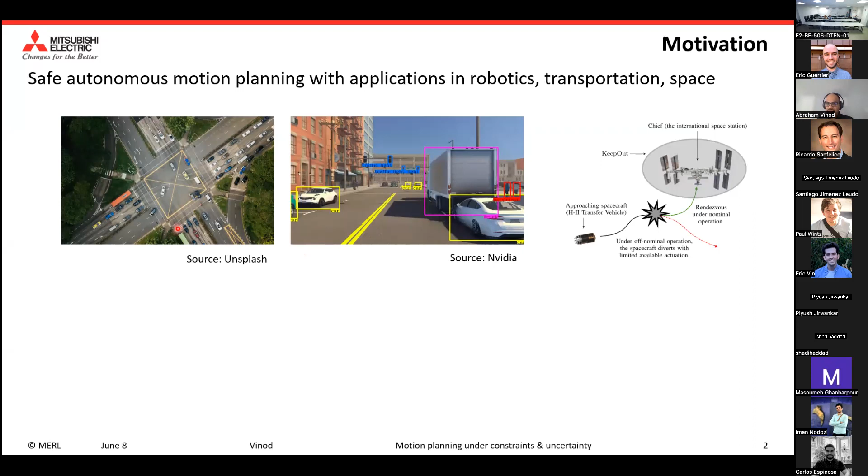So three motivating applications that I want to highlight in this talk are shown in these three figures. One is the need for fast and resilient multi-agent motion planning. This could, for example, come very handy when we have multiple autonomous systems navigating an intersection, or in factory automation, where you would have drones coordinating with each other while they transfer packets here and there.

A second problem that I want to talk about is the need to accept the fact that control on its own is not the end solution. We need to constantly interact with other modules like perception and sensing. And naturally, these sources of information are not always abundant. While these computing systems are becoming more and more powerful, there is definitely need to account for the fact that these computations take time. So we also would like to investigate motion planning when sensing is constrained.

And that's what I'll probably touch on in my second part of the talk. And the third part of the talk is the need to make sure that whatever planner we generate is resilient. By resilient, what I mean is, in an example like spacecraft rendezvous, when we're autonomously trying to dock with a spacecraft, in case of an event of a failure, for example, an actuation failure, we would like our motion plan to be such that we can abort safely. So we need to have a component of graceful degradation baked into our motion plan. This will allow us to ensure that the entire autonomous system stack is resilient under unexpected failure.

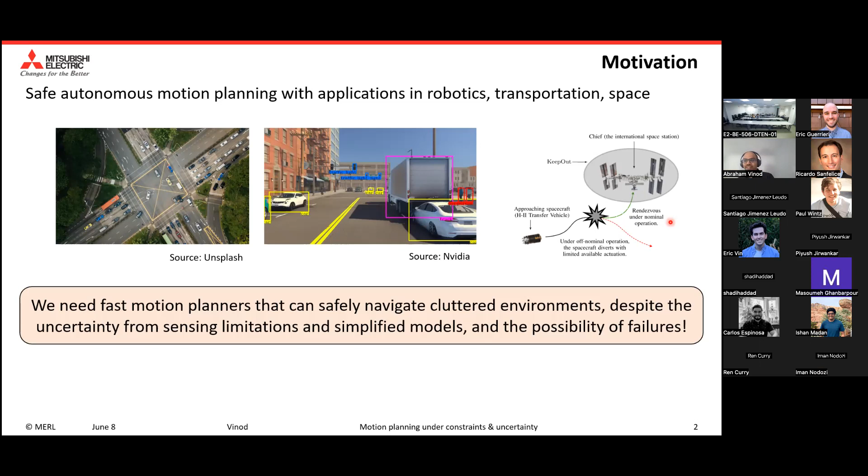So all in all, what I'm hoping to get you guys excited about is that we need fast motion planners that can navigate cluttered environments where there are a lot of obstacles and other agents acting in the environment, and we want to move in this environment safely, despite various sources of uncertainty, some coming from sensing limitations, others coming from the simplified models that we need to do fast motion planning. And together, we want to generate these plans such that we also account for the possibility of failures, and we do not cause more issues when a failure occurs, and we can stop prematurely.

And my proposal is to use data, reachability, and constrained control theory to solve this problem. That said, I have not solved the entire problem yet. This is very much a work in progress, but I can give you different directions that I've pursued, and hopefully I would love to hear your thoughts on if there are things I can do better or we can collaborate on.

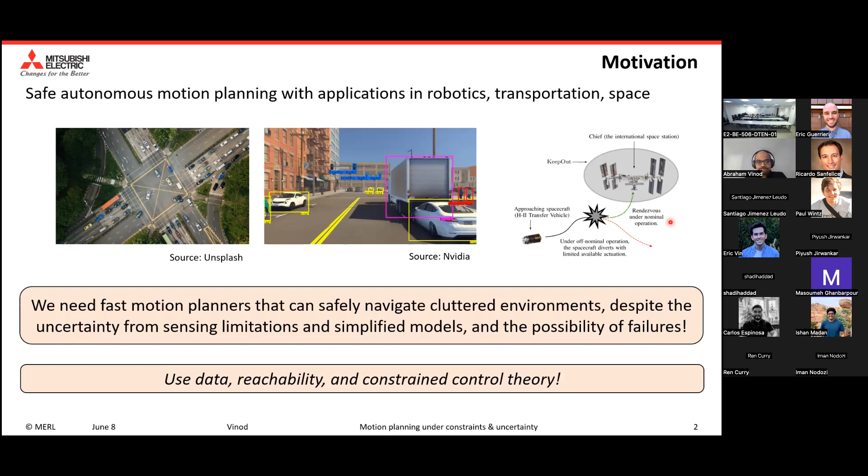So to give an outline of my talk, I'll start with the MERL overview. Since you guys have already probably heard of it, I'll maybe skip through things a bit faster.

The first part of the talk, I'll talk about safe RL-based multi-agent motion planning. Here, we basically try to ask the question: can we leverage learning to do safe multi-agent motion planning? I'll have some nice demo videos that we did with our experimental validation using Crazyflies.

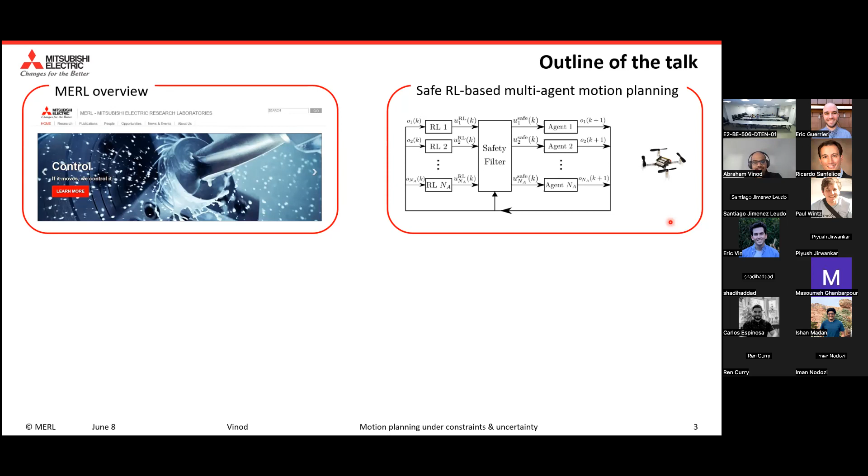In the second part of my talk, this is my work that came out of my postdoc, where we did safe motion planning under uncertainty when the sensing is constrained. This again we were able to validate nicely with TurtleBots. What we were trying to aim for is when we have very limited access to sensors, how do we sense obstacles so that we can reduce the uncertainty while planning in a cluttered environment?

Finally, if time permits, I want to also touch upon the safe spacecraft rendezvous problem, where we are trying to dock with the spacecraft autonomously while always ensuring that we can divert away safely in the event of a failure. All of these solutions use a combination of data, reachability, and constrained control theory. That's why I feel like these three are crucial ingredients to allowing safe autonomous planning.

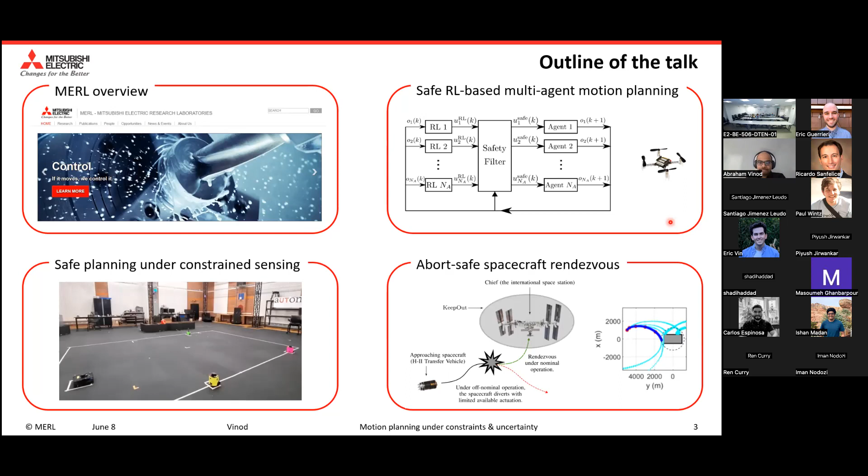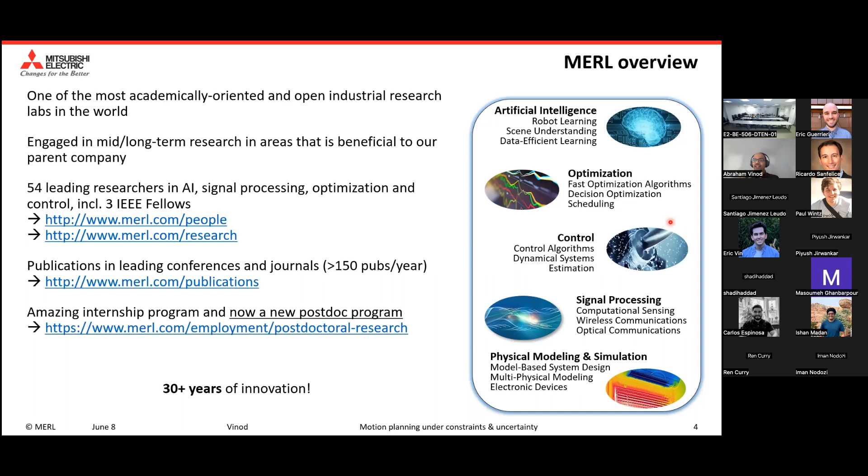So to get started, let me give you a quick overview of MERL as it is. We are an open research lab, a research division from Mitsubishi Electric. We work on problems varying from factory automation, robotic space applications, and including signal processing. We have around 54 researchers split across multiple groups, and we collaborate internally as well as with academics outside. Ricardo, for example, has collaborated a lot with us, and we look forward to having other collaborations as well.

This is my group, Control for Autonomy. We are led by Stefano, and we are around 7 researchers. At the high level, what we're trying to aim for is coming up with solutions that exploit structure in a problem to allow autonomous systems to be more capable. We would like fast, scalable, and real-time implementable solutions that can tackle a variety of tasks an autonomous system may be tasked with.

We are actively collaborating with a bunch of collaborators as well, and a lot of the problems that I'll be talking about today were actually either started off or ended with more and more collaborations. We have a lot of interns that join us during summer, and they kind of organically grow into collaborations with academic partners.

The target areas of our group started off with vehicle autonomous driving systems and space applications, and have since diversified into electric vehicles, connected cars, drones and legged robots. We are quite open in the research topic, and because we get most of our research problems either from Japan or from a creative group within us, we can work on a variety of problems. We do have expertise, and we do look out for expertise in a variety of topics like this. We are constantly trying to stay and learn the state of the art so that we can further help our colleagues back in Japan to implement these in our products.

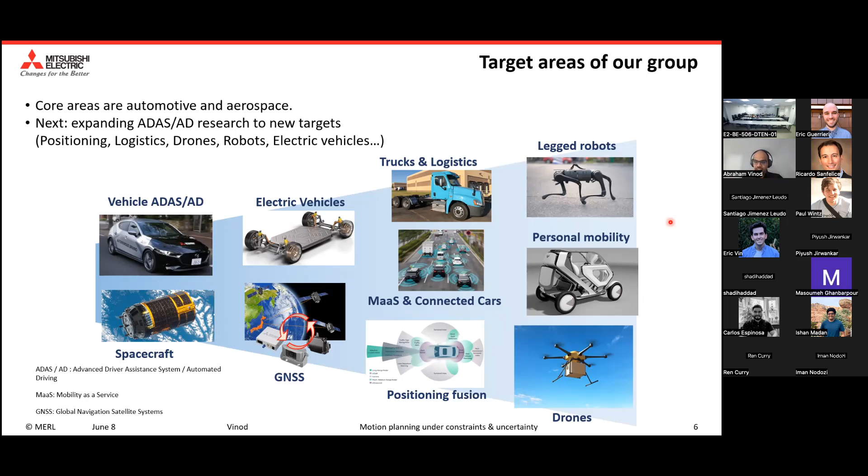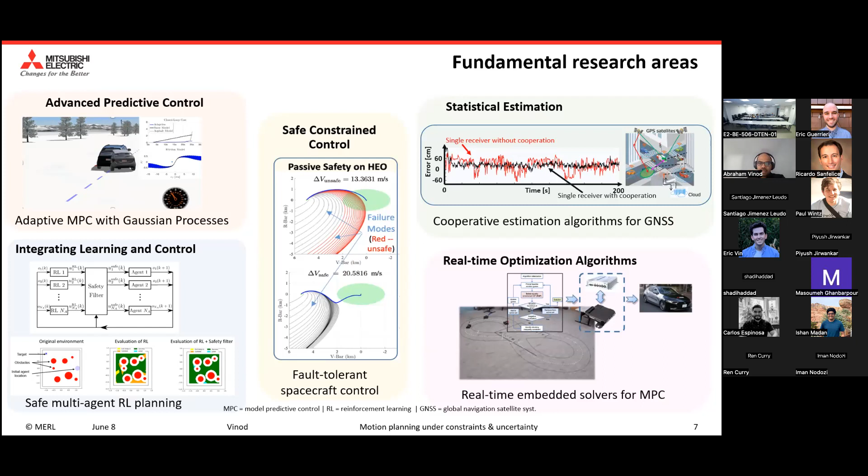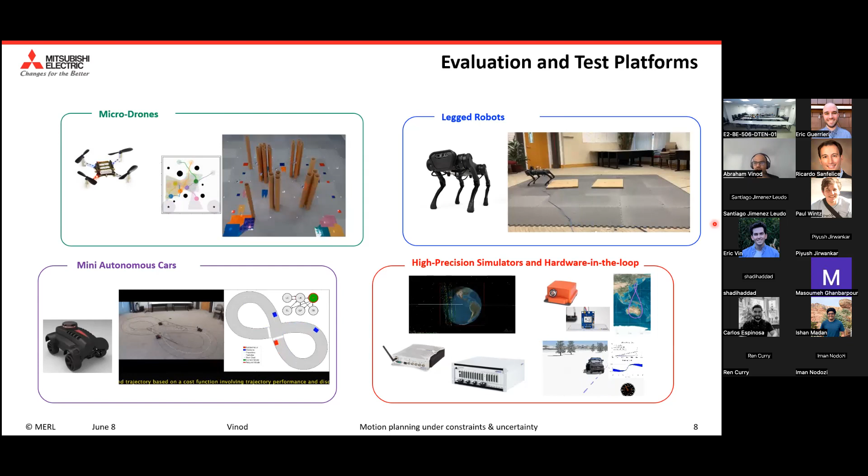We also have a variety of evaluation and test platforms, including drones, which I'll show you a couple of videos today. We also have legged robots, as well as autonomous cars, as well as hardware in the loop. All of these help us to validate whatever prototype solutions that we build at the lab.

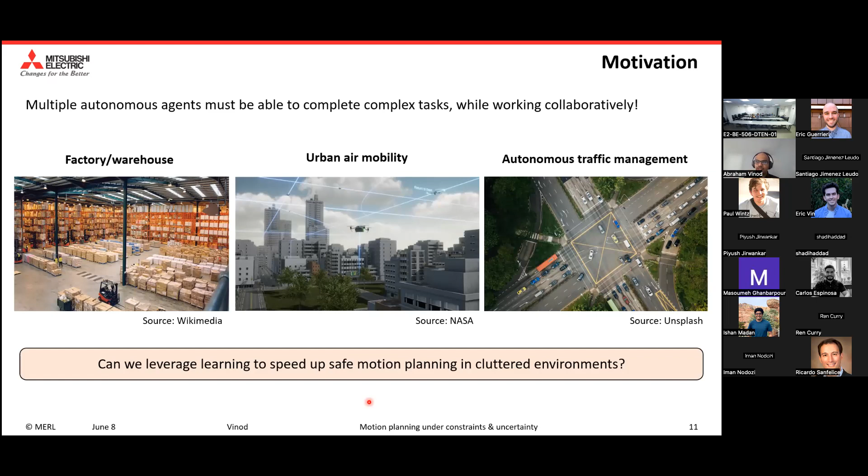As you can expect, multi-agent motion planning is an active area of research. There has been a variety of solutions proposed for a variety of tasks as well. What we have recently observed is that learning-based planners can use history to make decisions into the future. This can come in handy in problems where you have information coming from visual images, or for example, deep policies that can help in problems requiring a complex task description.

However, safety in general for these problems is a big issue because we typically have to rely on function approximation. In single agent systems, there have been a couple of solutions. Notably, there are barrier function-based approaches, where you define a function that kind of filters the actions based on this perceived possibility of safety.

Alternatively, there's a shielding approach where two-player games are typically solved offline to identify safe actions at every instant, and then the controller that the learning module prescribes is overwritten whenever it's unsafe. And more recently there's a predictive safety filter where MPC-like ideas are used to correct our actions.

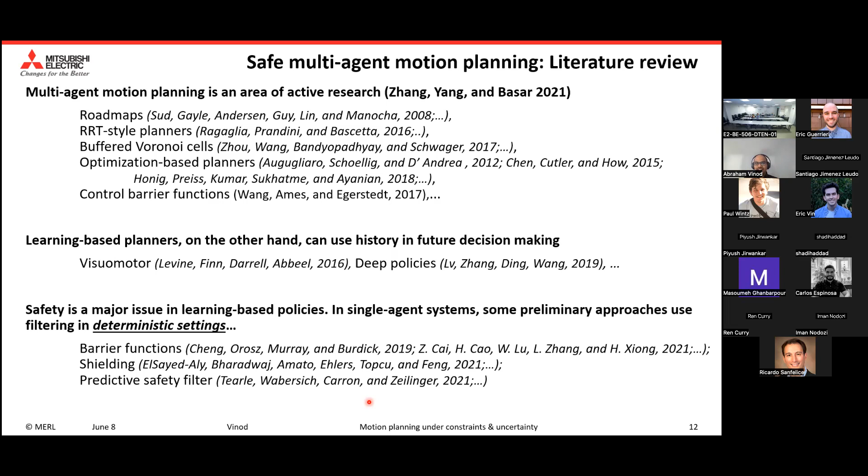Our approach takes the predictive safety filter-like approach and extends it to a multi-agent system, accounting for stochastic uncertainty. In this part of the talk, I'll propose a method to do safe multi-agent motion planning in stochastic and cluttered workspaces, where we use reinforcement learning to learn from prior data, and then use set-based control and convex optimization to achieve safety.

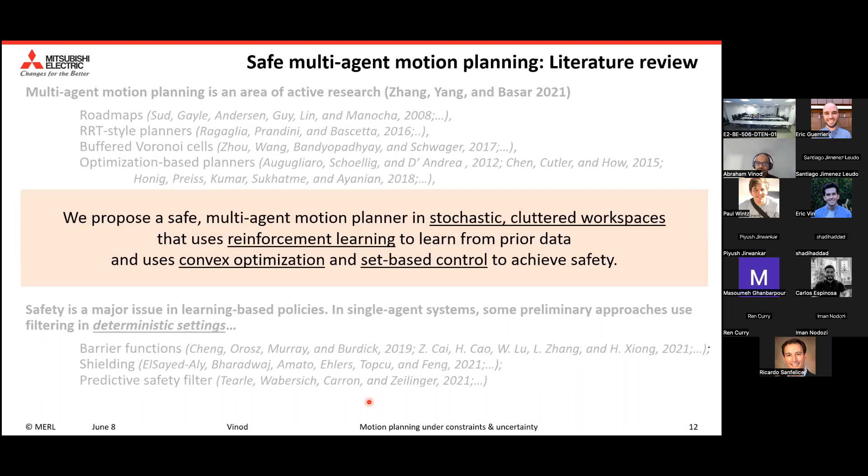As an overview, the safe multi-agent motion planning will use a combination of RL and constrained control theory. We'll use RL to define high-level tasks, such as reaching a goal or doing task allocations in such a way that some other objective is met. Giving the entire motion planning problem to RL will not give safety, and additionally it will be harder to train a policy.

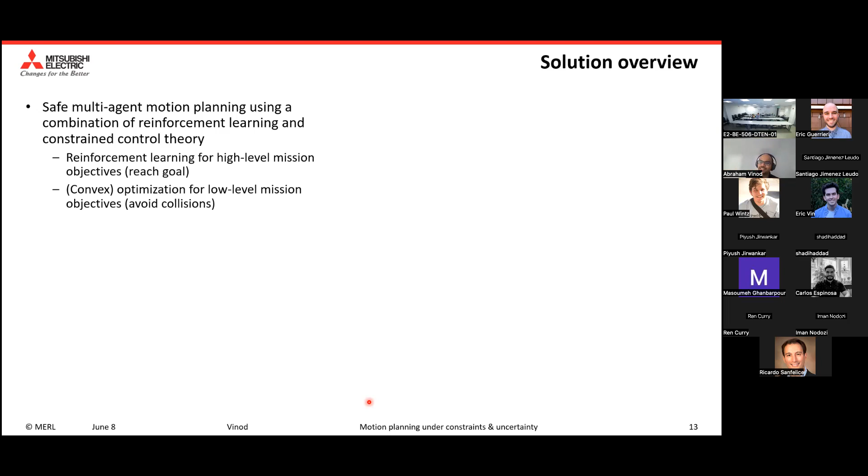So we split the tasks into a high level and low level, where problems like avoiding collisions will be given to an optimization-based safety filter. As a flow chart, we basically have the RL module giving us a candidate trajectory as action, and then a safety filter block that takes these actions and makes corrections so that the underlying system is safe.

At a high level, you can see that if, for example, RL makes two agents move in a way that will result in a collision, the safety filter will come up with corrections that ensure the resulting motion is collision free.

So why do we care about this combination? One, by training our RL agent to be single agent at this point, because we have decoupled the problem into a high level and low level task, a single agent solution is typically easier to train compared to a multi-agent solution.

Additionally, by using the safety filter, we can then tackle the non-convexities that arise with an optimization-based planner alone, because these problems require solving collision avoidance constraints that are non-convex. And finally, we will observe that the combination together gives a scalable as well as a real-time implementable solution.

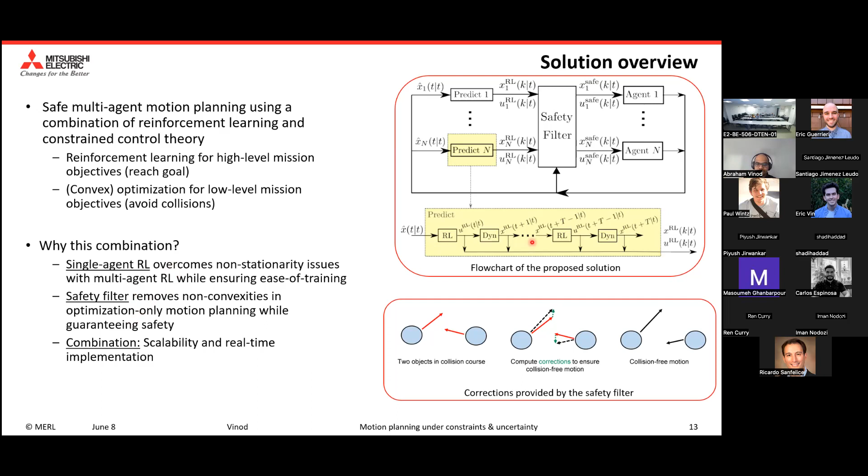So let me quickly go over the two steps: the RL block as well as the safety filter block.

In the RL block, the way we have tackled this training problem is by defining a double integrator dynamics for the quad rotors that would be our robots moving in the factory. We basically require a specification of a reference target, which, using the double integrator dynamics, turns into waypoints.

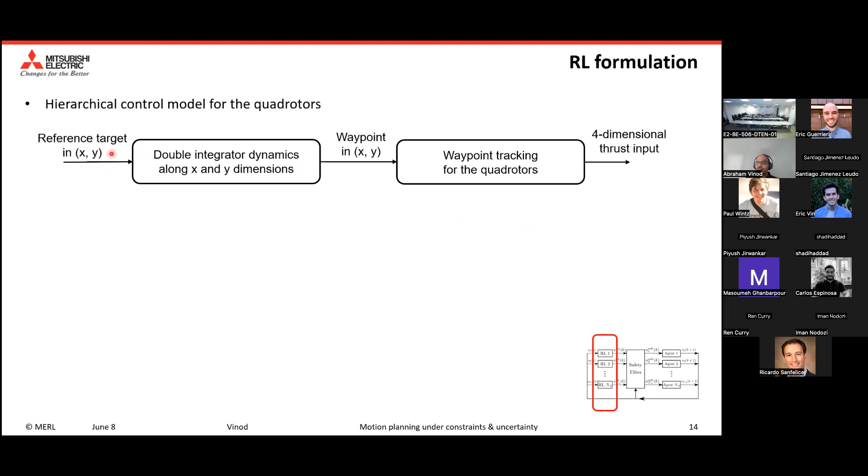We give these waypoints to a low-level controller for the quad rotor to move. So the action in this case will be the reference target. For the single agent RL problem, we have an observation space defined as the position and velocity of the agent in this dynamic space, plus the displacement to the target and displacement from the static obstacles, N_O of them.

Because this is single agent, we don't have to worry about agent-agent collision avoidance, so we have a much lower number of dimensions compared to solving it in a centralized manner. The action space is the reference target, as I said, so the RL agent prescribes the reference target for the drones to follow. Finally, we have the transition function and reward function geared towards making this reference planner work in the direction we want.

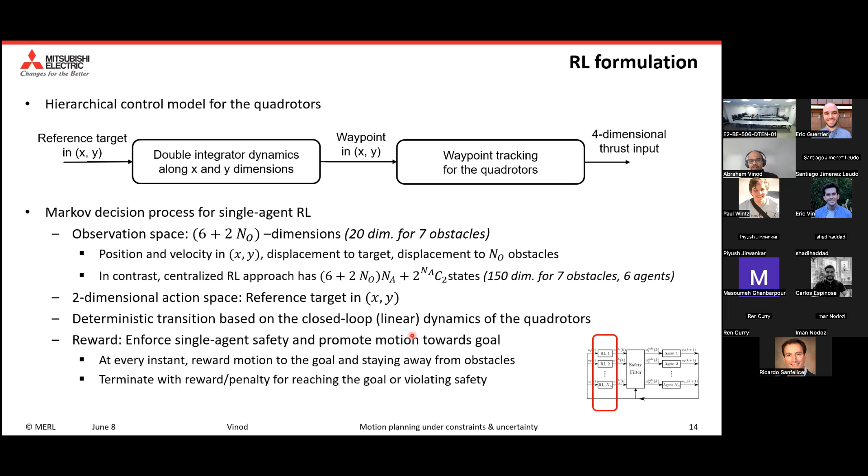On the safety filter side, we compute a corrected input controller that will make the system probabilistically collectively safe. By collective safety, I mean we want to ensure agent-agent collision avoidance, agent-obstacle collision avoidance, and staying within an operating region.

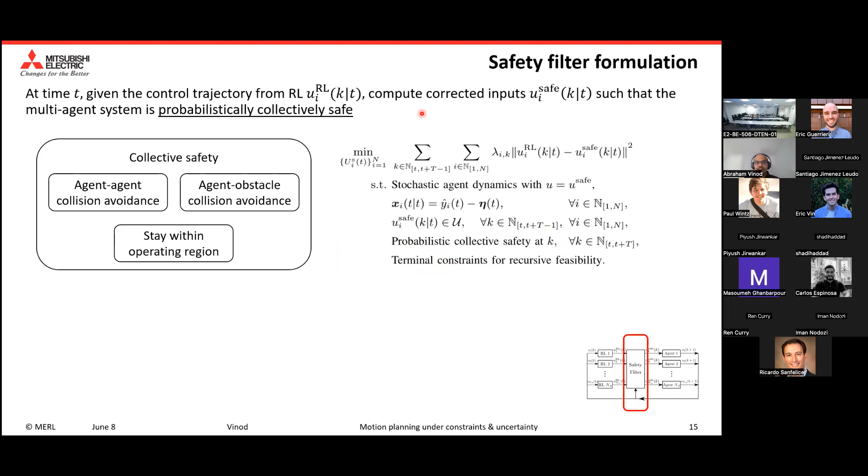At the safety filter level, we solve a problem like this: we get the RL controllers at each time step, then compute the minimum corrections required to satisfy collective safety. Additionally, we have terminal constraints to ensure recursive feasibility, since it's a model predictive control style solution. We then solve this problem for the safe controllers, which we apply.

So naturally, this is not an easy problem to solve, it's a non-convex optimization problem. The way we tackle this is through convexification.

For example, for the keep-in constraints, we come up with a constraint tightening where we take the original convex constraints and tighten them so that we have a sufficient condition to satisfy staying within the operating region.

Similarly, for agent-agent and agent-obstacle collision avoidance, we do constraint tightening after a convexification step. For example, for collision avoidance between two agents, in a relative coordinate frame we want to ensure one agent stays outside a bigger circle. By considering a supporting hyperplane and then tightening it, this green area becomes a sufficient region for the second agent to stay in, guaranteeing probabilistic collision safety as we desire.

By doing this convexification, the problem gets reformulated as a convex quadratic program, which we can solve very quickly, allowing us to come up with safe controllers originating from the RL controller with minimal deviations. This is what we then give to the system.

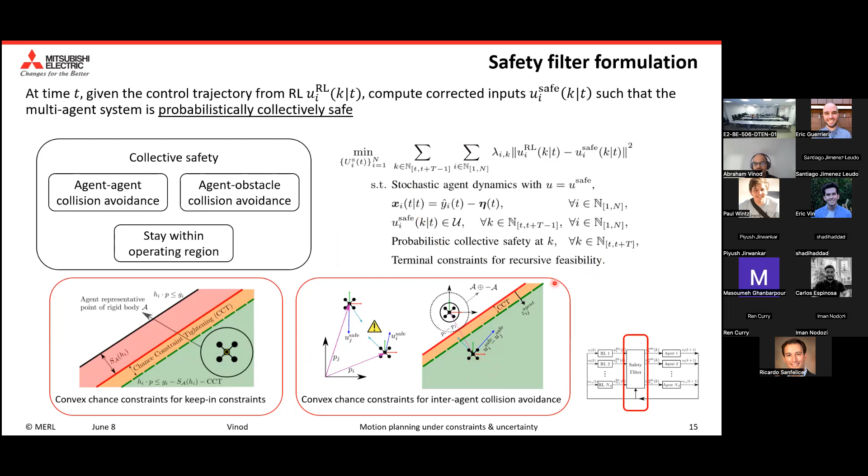There are a lot of questions hanging around here, like: is the safety filter really necessary? To answer this, we did a validation where we took the RL-based controller without uncertainty and asked it to go towards its target from different starting locations.

In this leftmost plot, I'm showing the RL controller without uncertainty, where the green region is where it reaches the target, and orange is where it actually ends up colliding. As you can see, without the safety filter there are a lot more regions where it collides, whereas with the safety filter it almost disappears.

This too is a case with no uncertainty involved. When we add process and measurement uncertainty, we get a slightly different result, since sometimes uncertainty could help you and sometimes it could hurt you, but with the safety filter we again get much better performance. There are some places where, if you start from there, the safety filter is not able to recover from a deadlock, but it will always guarantee safety, which cannot be guaranteed using an RL-based controller on its own.

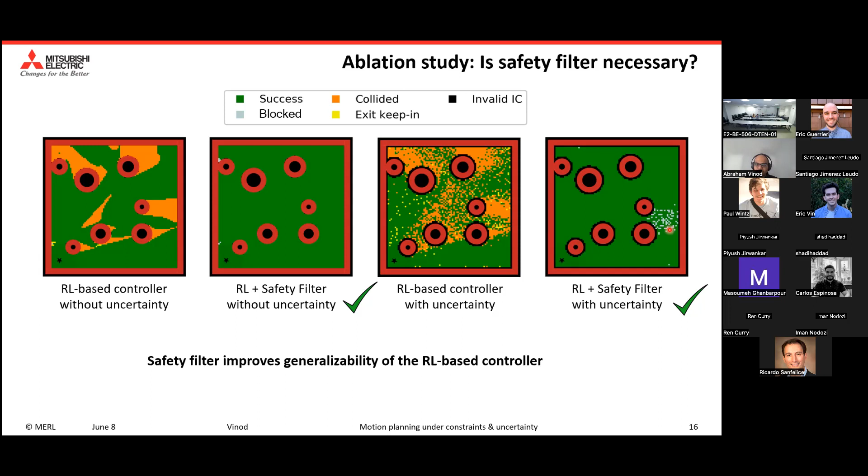So all in all, we can say the safety filter improves the generalizability of the RL-based controller. And then the other question is: is the RL component necessary?

So for this, we can compare this with a pure MPC-based solution, where we directly ask it to solve a centralized solution, and then compare the performance of approaches.

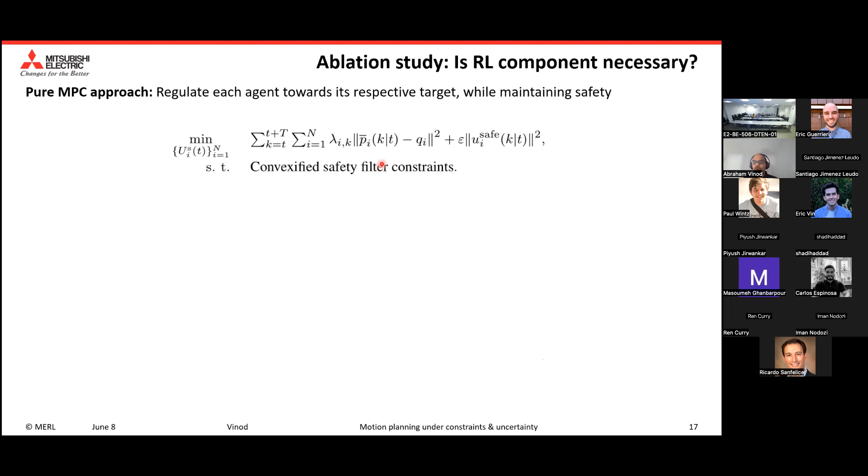What we observed is that when we use a pure MPC solution, first of all, the terminal constraints are quite conservative, and it breaks down the MPC solution from the get-go.

However, when we relax a constraint, there are 55% of the time where it actually works. Whereas when you use the RL-based solution to do the warm starting, if you will, we get a much higher success rate.

That said, because the RL-based controller is a single agent controller, which is then coordinated with a safety filter, it is more suboptimal compared to the centralized solution, which is expected.

So there's a trade-off that will always happen because we are breaking the problem into two parts and solving it independently. But the key takeaway is that with the RL-based controller, we actually have a significantly larger success rate without a much higher number of deadlocks or collisions.

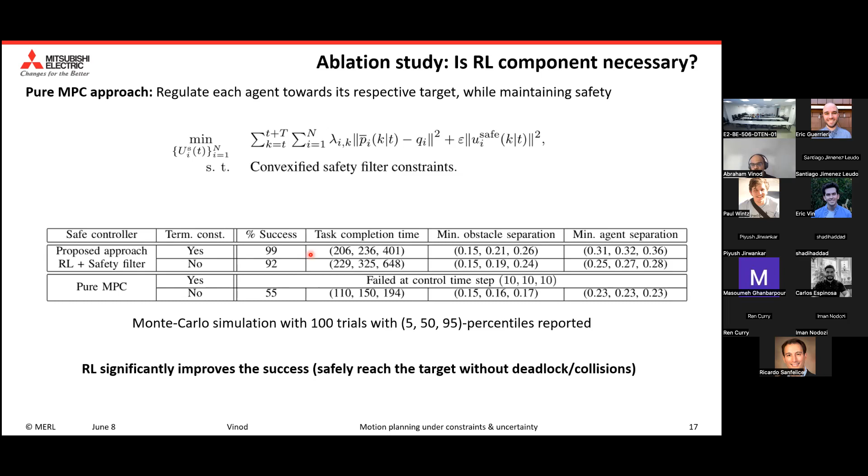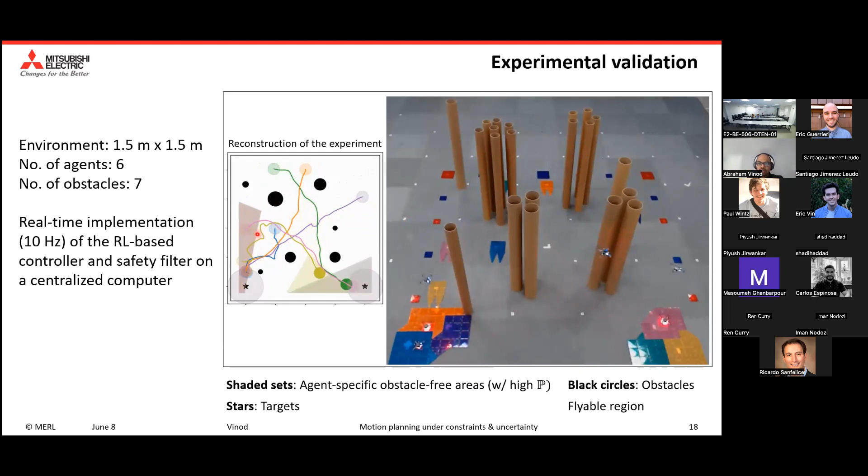As you can see, the drones are able to negotiate with each other. Remember that they all originally started with a single agent RL controller, which doesn't know where any of the other agents are, or doesn't care about them.

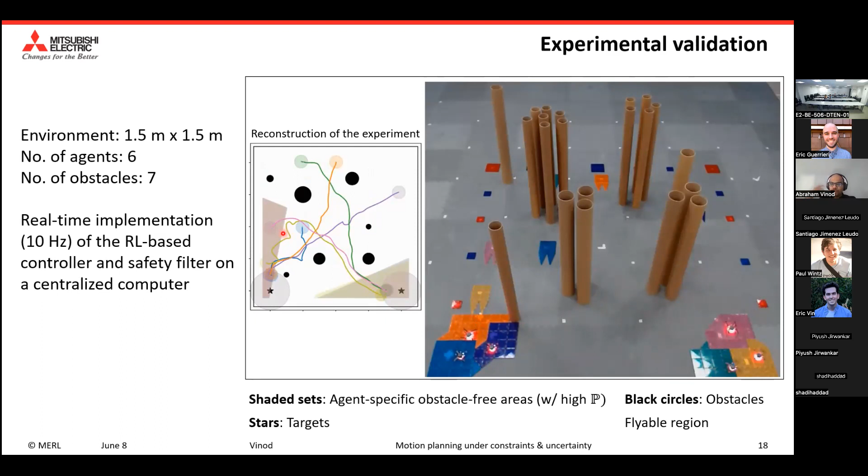The safety filter takes the responsibility of maintaining safety in those cases. And the RL controller is what prompts the drone to go towards its target.

We also did the experimental validation of the RL being a necessary component, where we replace the RL controller with a simple proportional controller for warm starting the solution. And this is how the experiment works.

So while the RL-based controller is able to, because it was trained on prior data, complete the task much faster, the proportional controller always guns for the target and gets stuck in front of the obstacle, and the safety filter has to push it either side to go around it.

And as you will see, there is one of the drones that actually does get stuck in a corner there because it's trying to get over here, and this is like a pocket of sorts.

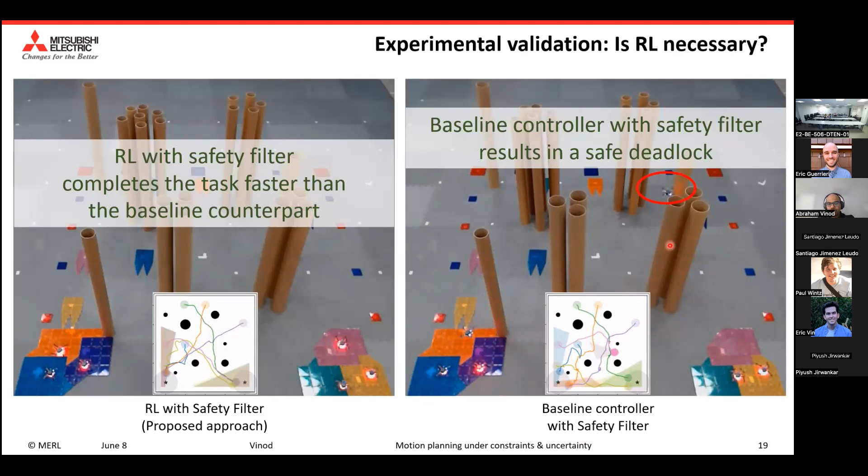So before I conclude this topic, I also want to highlight that this approach does scale well because we have a single agent solution that's replicated across agents.

The next steps that we are going to pursue is to look at a decentralized formulation of this, where we don't have a safety filter that prescribes everyone's actions. We are also looking into how we can relax the Gaussian uncertainty that we currently have in this approach.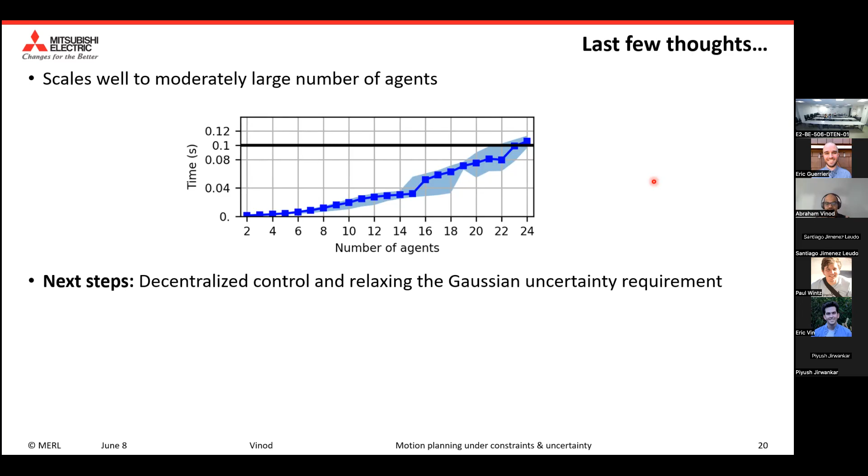So this work is already published in ICRA, and we have a TRO paper under review. The key takeaway I want to leave with this part of the talk is that we can construct a safe, real-time implementable multi-agent motion planner using reinforcement and constrained control.

So before I go to the next part of the talk, are there any questions?

I have a quick question. Yes. So when you implement this, in other words, is the RL run offline, and then you implement the policy that you learn offline on a model?

So the RL training is done offline, but the RL policy is evaluated online. So we wrap the whole thing in a receding horizon solution. So every instant we look at where we are, ask the RL policy to give us a sequence of control actions to take, and then the safety filter corrects for it.

Does that answer the question? Yeah. And so RL, I guess, if I understand correctly, the learning occurs offline, but online you calculate the policy. Yes. Yeah, so that's our preliminary approach.

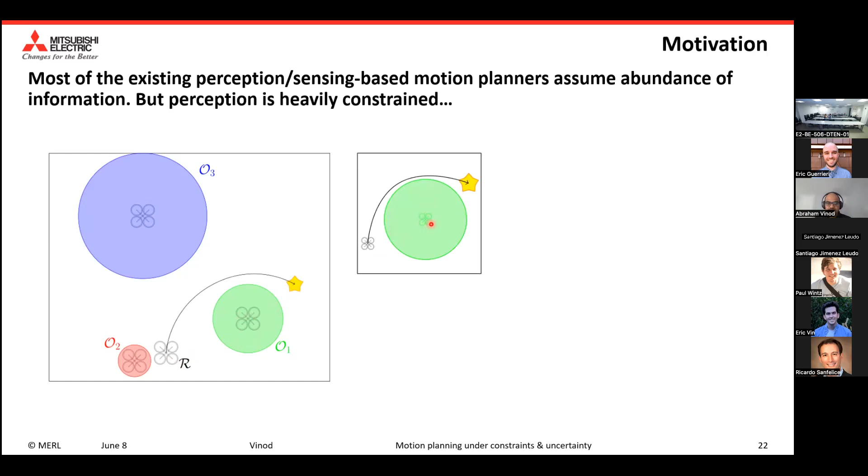But regardless of all that, this drone, if it has to move from here to here, in reality only needs to care about the green circle. As long as we know, or if we can reduce the uncertainty around this obstacle represented by the green circle, we can in effect generate a better motion. That's what we were trying to encapsulate in the theory and algorithm of this approach.

In other words, how do we design a safe trajectory for a robot to complete a task under uncertainty, where there would be things coming from sensing as well as process noise, while reducing uncertainty via sensing, but acknowledging the fact that the sensors are limited?

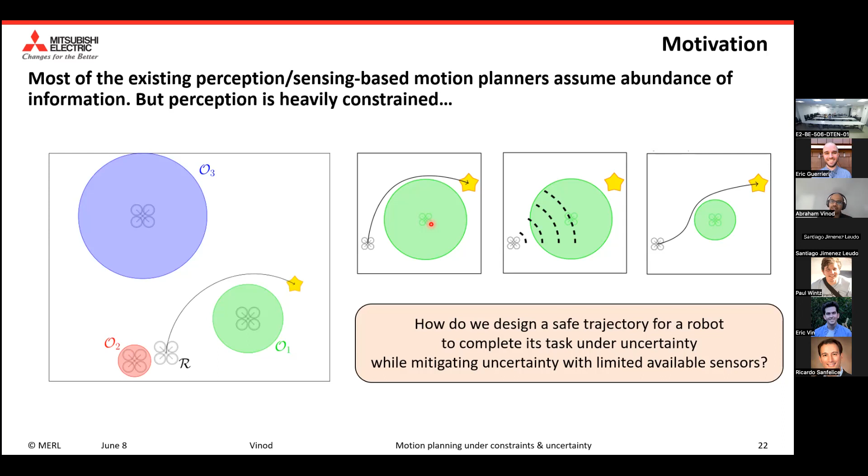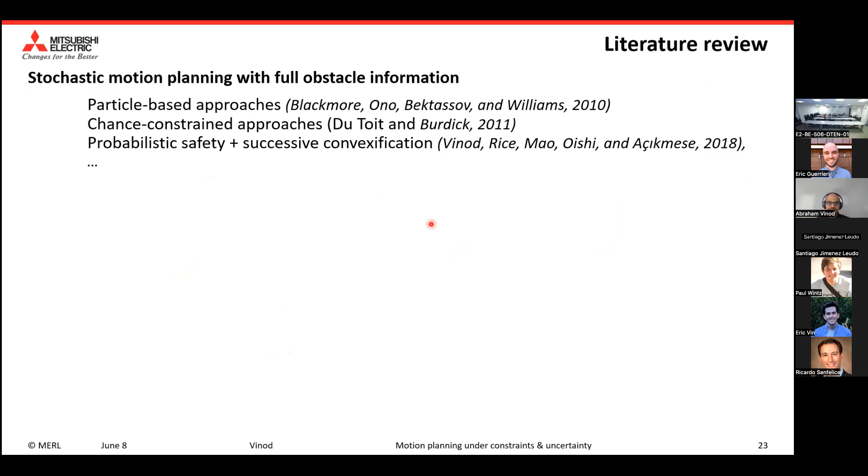Specifically, at a high level, this problem, when there's full obstacle information, has a lot of prior work using particle-based approaches and chance constraints, as well as using successive convexification. But what we are interested in is the case where we have a requirement that a robot can sense only a fixed number of obstacles at every time step.

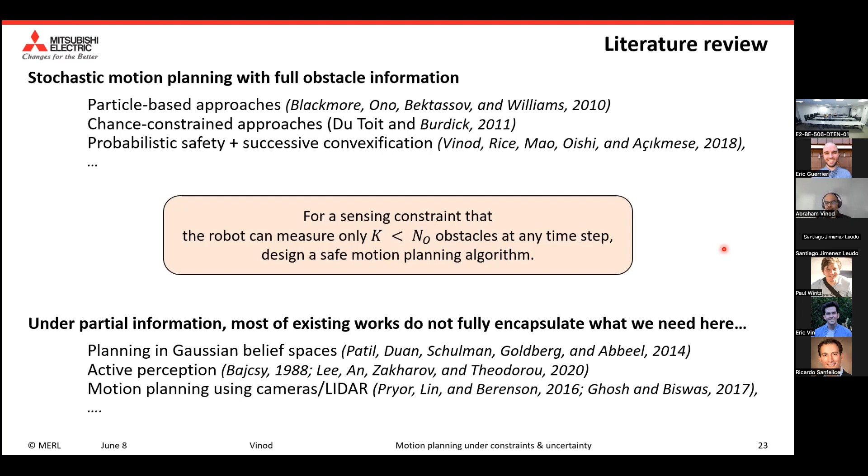How do we decide which obstacles to sense, and how do we account for that degree of freedom into our motion plan so that we'll always be safe? When we make this restriction, we're essentially working on this partial information setup. There are some works on Gaussian belief spaces and active perception, but they don't fully encapsulate this constrained sensing aspect, where we have to simultaneously do sensor allocation as well as motion planning. What we'd really like is to sense only those obstacles that are really relevant to the trajectory, and what I'm going to propose is a way to do that.

So this is the problem setup that we have. We have a world where our robot has nonlinear dynamics, but it's controlled. We have obstacles which have stochastic dynamics, but are uncontrolled. Stochastic, because we'll assume that the sensing measurements allow us to build a Kalman filter for every obstacle, and they'll keep updating this Kalman filter depending on if and when we sense an obstacle. Given this setup, we have to do motion planning where we minimize some objective that's a function of the robot state and control, while ensuring this collision probability is less than alpha.

To make things simple, what I mean by collision probability is the probability that our obstacle state lies inside a ball around the robot is less than some very small number alpha. If that holds, we have a safe motion plan. So we need to solve this motion planning problem and simultaneously decide a sensor allocation that decides which obstacle to observe in the next instant. Only when I observe the obstacle do I get information for the Kalman filter. Otherwise, I just use the Kalman filter's prediction step, which has ever-growing uncertainty, to feed into my motion planning problem. This is the setup I'm going to work with.

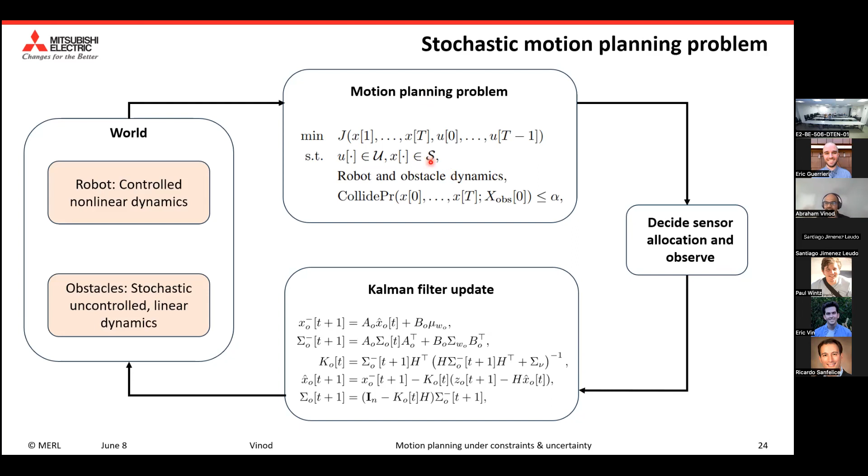So there are a couple of key insights that we had, and I want to highlight those, and then I'll show you the experimental validation of this approach.

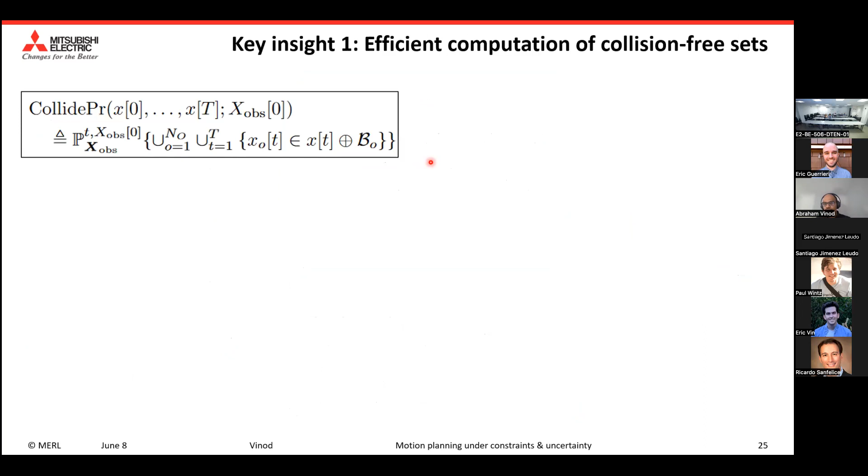The first is, how do we compute these collision probabilities? In general, this collision probability is a multi-dimensional integral, and it's hard to compute accurately. So what we did was use one of my previous results: if you want to avoid hitting an obstacle with high probability, given that the obstacle has a rigid body and I have a rigid body, in this work we showed that it's equivalent to avoiding a Minkowski sum of a specific level set of a Gaussian that describes the obstacle's information grown by the rigid body.

This gives us a nice result. If I have a collision avoidance probability constraint like this, then I essentially have to stay outside a different ellipsoid, an ellipsoid with the same shape as the covariance of the Gaussian, centered about the mean position of the obstacle, and everything is easily computable. So this collision avoidance constraint, which is a hard non-convex constraint to solve, becomes a simpler, still non-convex constraint: stay outside an ellipsoid, where these ellipsoids are easily computable. This is the first insight we used.

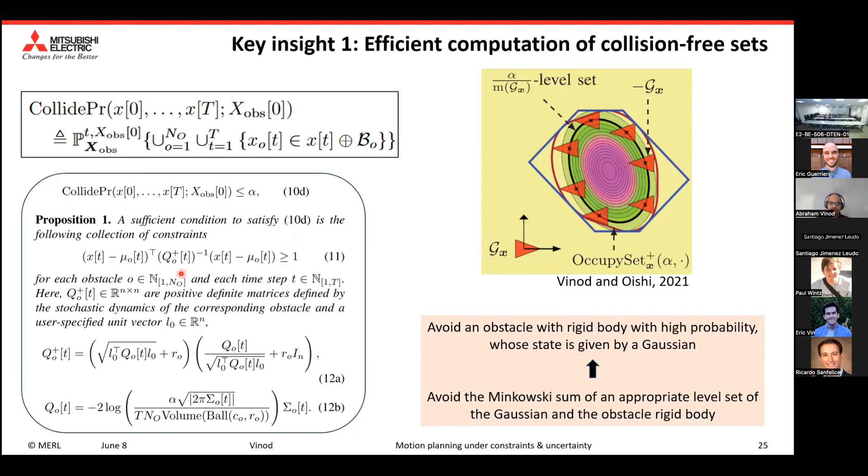The second insight is, now that I've replaced this constraint with avoiding an ellipsoid, we still have to contend with non-convex collision-free constraints as well as nonlinear dynamics. So we start out using a sequential quadratic programming solution to find a local optimum. In case you're not familiar, sequential quadratic programming essentially linearizes the dynamics and the constraints, and then repeatedly solves it until convergence or until a stopping criteria.

In this case, we took these collision avoidance constraints and converted them into separating half-space constraints, similarly linearized, and additionally linearized the dynamics as well, and keep solving this again. Because this is now a quadratic program, it's much faster to solve, and we get a local optimum. The local optimum is a very loose term here—we might actually be suboptimal, very poorly so, but at least we can hope to achieve a feasible solution.

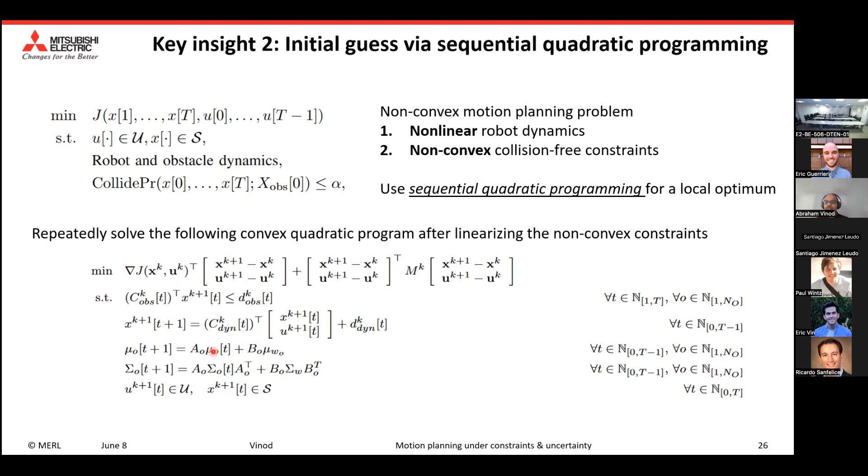But there is also another observation that we needed. The thing is, by solving an SQP problem on its own, because we are linearizing the constraints, we typically end up with a situation that looks like this. So even if these obstacles are over here, because of the linearization, in effect our solution would be requiring that we stay to the right of this region, which means we would be heavily conservative.

So going off of this work from Behcet Acikmese's group at University of Washington, what we also did is a project and resolve approach, where once we get a solution to the sequential quadratic program, we then projected the solution back onto the obstacles to kind of enlarge this collision-free space.

So the way I like to think about this is, if you're walking in the dark where you can't see, you would reach out with your hands to figure out where the obstacles are. That reaching out with the hands is essentially what we're doing in this projection step.

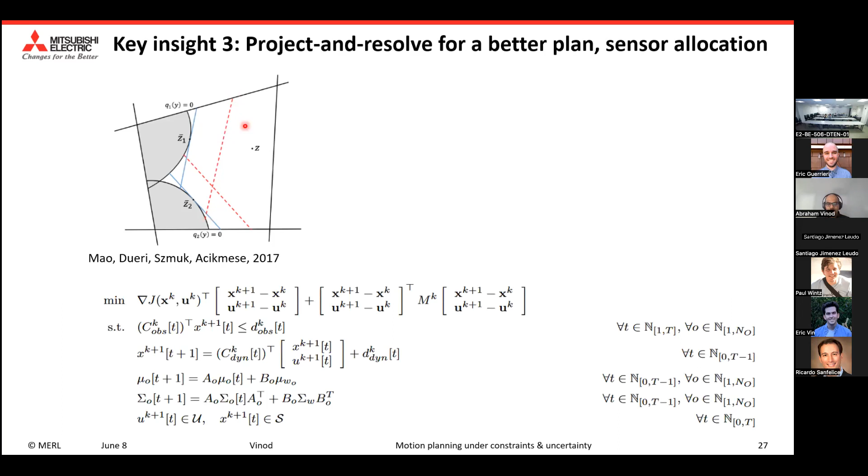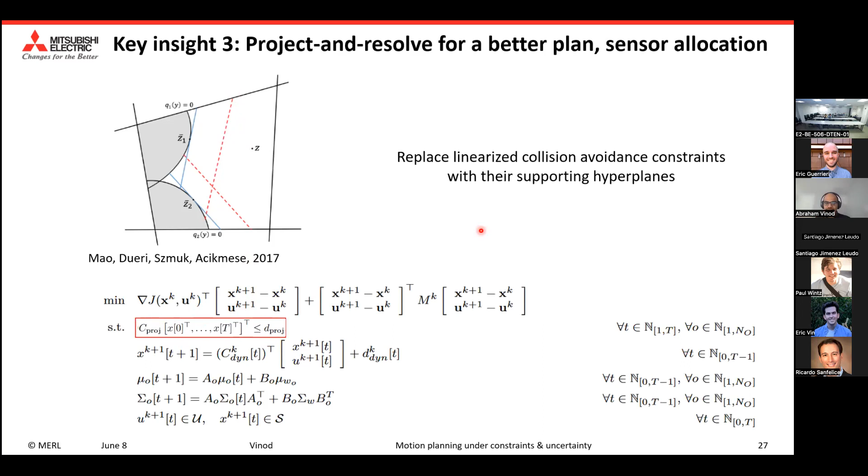And with this larger collision-free space, if you go back to our SQP sub-problem, we have to replace this constraint with supporting half spaces now, as opposed to the linearization. And what this gives us is two benefits. One, it just allows us to polish the last solution to hopefully make it less conservative. And additionally, it allows us, as a byproduct, a sensor allocation.

What we are using in this case is a sensitivity analysis result, which says that the dual variables of an optimization problem allow you to account for how the objective would change if I change some of the constraints. So in other words, in an optimization problem that looks like this, the dual variables associated with this constraint tell me, the lambda star tells me, if I change delta, how much will my optimal objective change?

And that's exactly what we need in this case. In other words, when we solve the project and resolve problem, we look at the dual variables to decide which obstacle is most affecting our trajectory, and then we pick that to sense. And because of this, we will automatically get back to the intuitive solution that we had in the beginning, that we only need to sense the obstacles that really affect our trajectory.

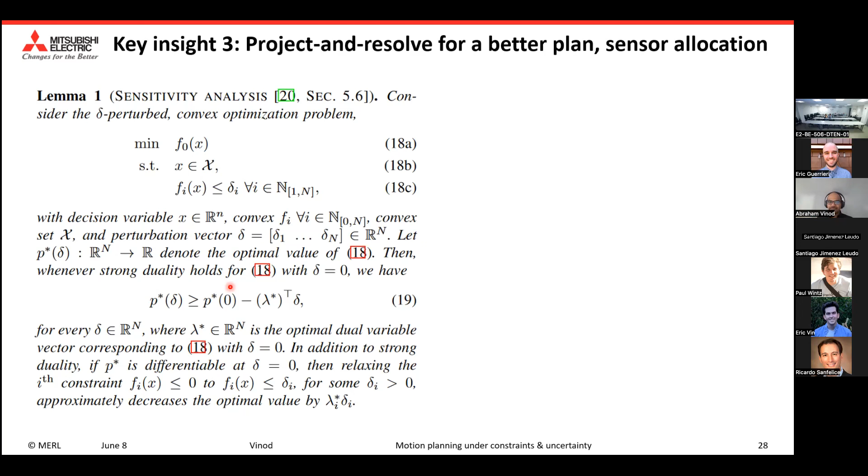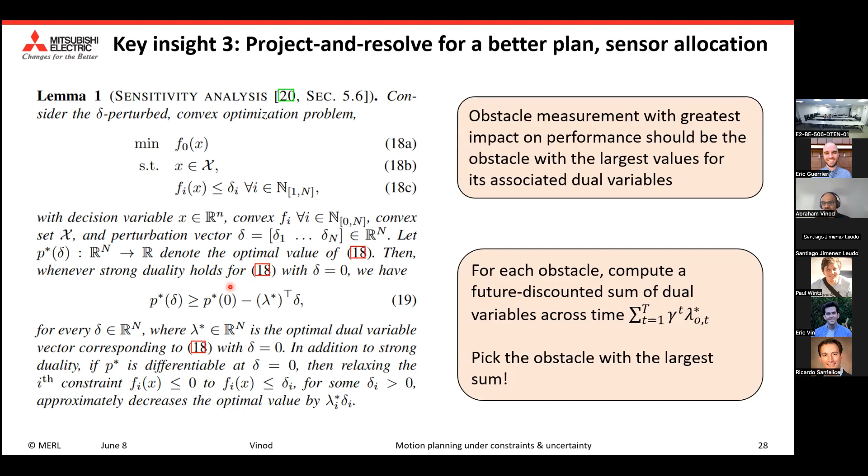So as I said, we want to measure the obstacles that would have the greatest impact on the performance. And the way we do it is by considering for each obstacle a future discounted sum of the dual variables, and then pick the obstacle with the largest sum, or pick the k number of obstacles with the largest sum, depending on the sensor. So tying it all together, this is the problem.

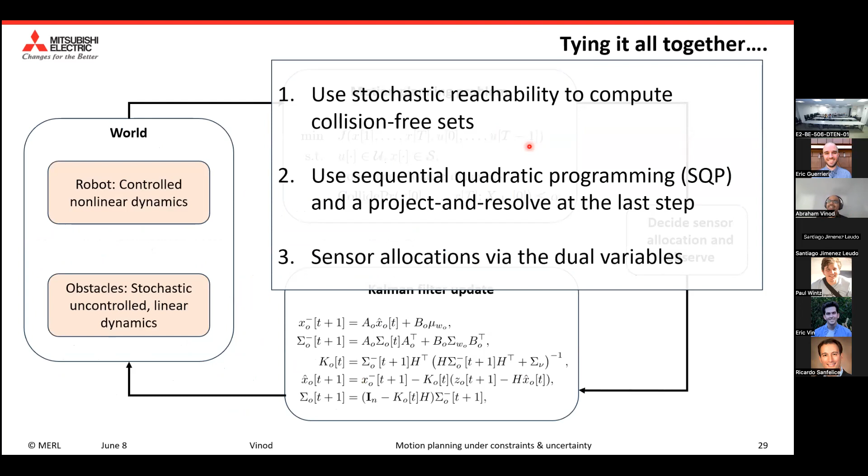And the way we solve it is in these three steps. First, we use stochastic reachability to compute an efficient and tractable collision-free set. Then we use SQP and a project and resolve in the last step, and then finally decide the sensor allocation, using the dual variables.

And the way we sense it is by using a camera on the robot, where because each of these obstacles are color-coded, whenever we decide to, or whenever we see this color on the camera, we then query the motion tracking system to give us a true estimate of the position. Otherwise, we don't have any position estimates, and we just keep on using the Kalman filter's prediction steps to do the motion planning problem. Let me play this video.

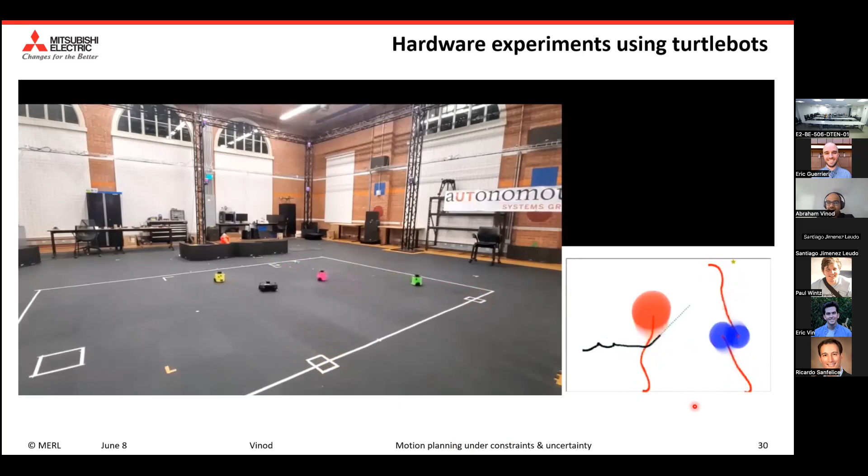So initially, because this agent's uncertainty kept on growing, we turned towards it to view it, and then whenever we have agent obstacles' uncertainty affecting our trajectory, we keep on viewing that to mitigate the uncertainty. Here, as you saw, this uncertainty grew too large, and then we sensed it, and then we stopped sensing. So we never sense the agent obstacles which don't come into the purview of our trajectory. Since obstacles are far away or do not affect our trajectory, we do not sense them, and you only sense those obstacles that are important.

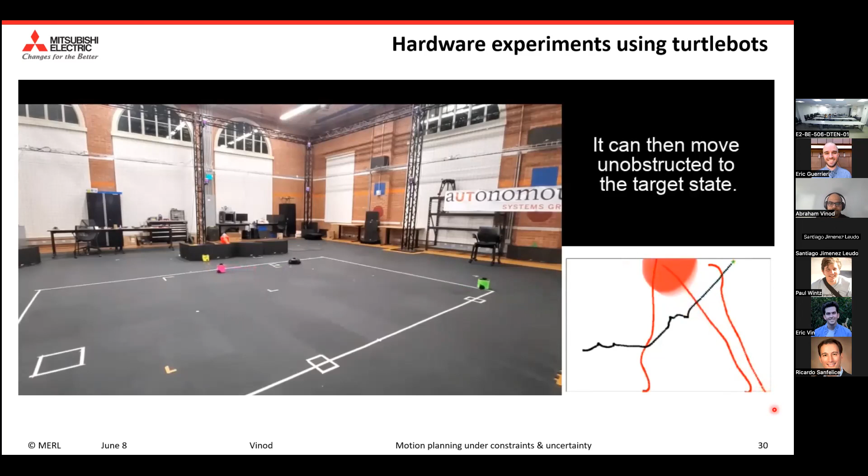And because we are using SQP in this case, and because of current advances in computing solvers, this again allows us to do this planning in real time and account for this perception block as well. And this is the computation time currently on a standard desktop.

So before I wrap up this topic, we also tried other approaches and did some comparisons with the Gaussian belief space motion planner. But for simplicity, I'll just talk about the other different sensing approaches that you could take.

So Safely is the approach we said. Alternatively, we could sense the obstacle with the largest uncertainty. We could also sense the obstacle which is the closest, or do round robin sensing where we sense every obstacle. What you'll notice is that our approach requires fewer observations, just because we are only observing what is really necessary.

And we also do not collide, because of the stochastic reachability component, which is a sufficient condition in this case. But there are situations where we either run out of control actions - this happens when we're in deadlock, have numerical issues, or timeout from the SQP solver. But in general, what I want you guys to take away is that we can do motion planning under uncertainty and account for this duality aspect to help better sense obstacles when there's uncertainty.

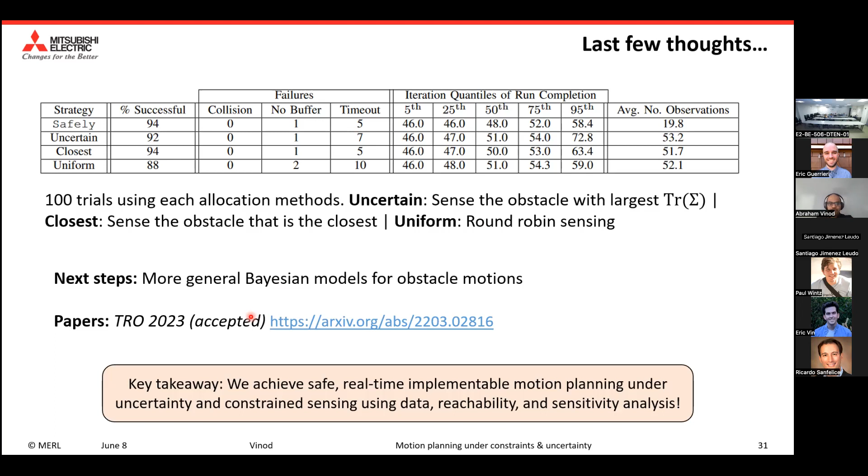As next steps, we are also considering using Bayesian models to generalize beyond the Kalman filter approaches, and as well help us go beyond the obstacle motion that we are currently considering. This paper was accepted at TRO recently, and an arXiv paper is here as well. All right, I'll stop here to see if you guys have any questions.

So one question: how fast can you solve the optimization problem for this one?

I think... oh, this is the current - this right now shows the entire SQP solution and the last QP that we solved.

It did indeed fail. We had timeouts because we were a bit aggressive, because we wanted to maintain the control frequency around 5 hertz, if I remember correctly. So that definitely put a strain on the solver. But as you can see, most of the time we are quite under. And this is again a grad student's code, so if you optimize it, we expect it to be better. This was also implemented in Python, so going to C, for example, could also definitely make improvements.

If it couldn't solve the problem in time, do you have another strategy? I mean, if you can't optimize.

What we're hoping for, or we did do as well, is we were maintaining a buffer of the past MPC solves. So there were of course situations where we could time out. Even though we timed out these many times, it's not like we actually had to stop the solution - it would then go back to this case. This is where the real problem comes, where we used all the past MPC solves, and the problem, just because of the non-convexity or non-linearity, is not able to converge for the 10 time steps that we have in our buffer.

So this happens more rarely - this is one iteration of some very long iteration among 100 trials. So it's quite rare, but we can't guarantee that that will not happen. It's a good question, yeah.

In those cases where you don't converge to a solution, do you know that a solution exists and you're just not able to find it numerically, or is it possible there's no solution?

I believe a solution should exist because we are not moving very fast. So now that I'm thinking about it, we could always solve for a less aggressive objective, like maybe try to stay in its own place. But the issue at hand is the obstacles are not under our control. So we had a pre-planned trajectory with perturbations associated with it, so even if we stay in our own place, it could mean the obstacle could come and hit us.

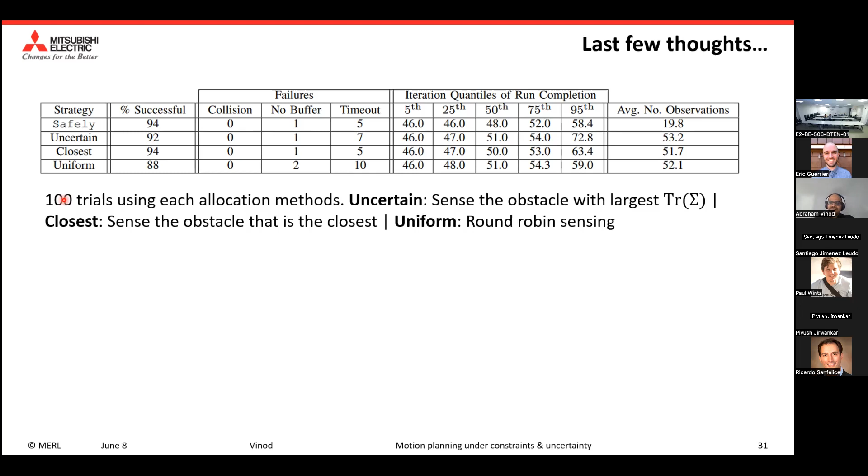Great, thank you for the great questions. This is great. So since you guys have been asking questions, I will quickly touch the last topic as well on the abort safe spacecraft rendezvous problem, and try to wrap it up in 5 more minutes.

In this project, we are interested in doing safe rendezvous where there could be potential for failure. An application of interest is when you want to rendezvous with the International Space Station, for example — we do not want to collide with it in case of a failure on our spacecraft. So this requires us to be careful on the rendezvous trajectory that we plan.

We could have multiple types of failure. We could have a complete loss of actuation, which we call passive abort safe trajectories, in the case where we can divert safely. Or we could have a partial loss, where we could have, for example, redundant thrusters on the spacecraft, which can kick in the event of a failure.

All of this has to tackle uncertainty coming from both actuation mismatch as well as navigational errors. There are some approaches that tackle this problem under a simplified setting, where you either have passive abort safe with no uncertainty, or where you explicitly compute the divert trajectories, which comes at a very high computational cost.

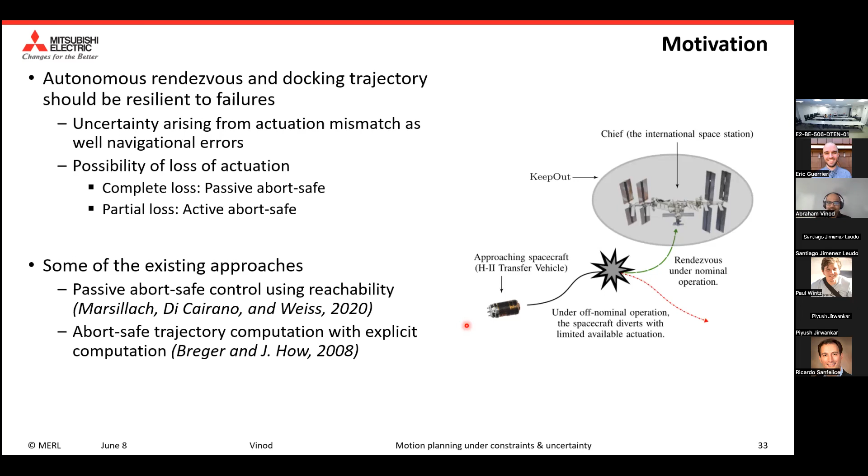What we use in this approach is stochastic reachability and constrained control, to avoid having to do explicit computation while tackling the uncertainty aspect as well. So in this case, we use a combination of stochastic viability and trajectory optimization.

If you are not familiar with stochastic viability sets, what we are interested in is, given a collection of target sets, identifying this blue set from which a desired level of probabilistic safety is satisfied. For the keep-out region in this abort safe rendezvous problem, we have this keep-out set.

The way we do it is by splitting it into 4 different half spaces and then computing the stochastic viability set of staying within those half spaces. We need this because the stochastic viability computation right now is best suited for convex sets, avoiding or reaching convex sets.

So in this work, we computed an inner approximation of these viability sets. That way we can ensure that staying within this inner approximation continues to keep us safe in the true problem aspect. Our approach is amenable to offline computation.

We actually compute these sets offline, and then online, the system just tries to stay within these sets. And what we can guarantee is that as long as you stay within these sets, there is an abort control law, which you can also explicitly compute, that will allow us to divert safely in the event of a failure.

Finally, we use a model predictive control to enforce the safety. Because there is this optionality component involved, we use a mixed integer quadratic program to solve for these different options of the stochastic viability sets.

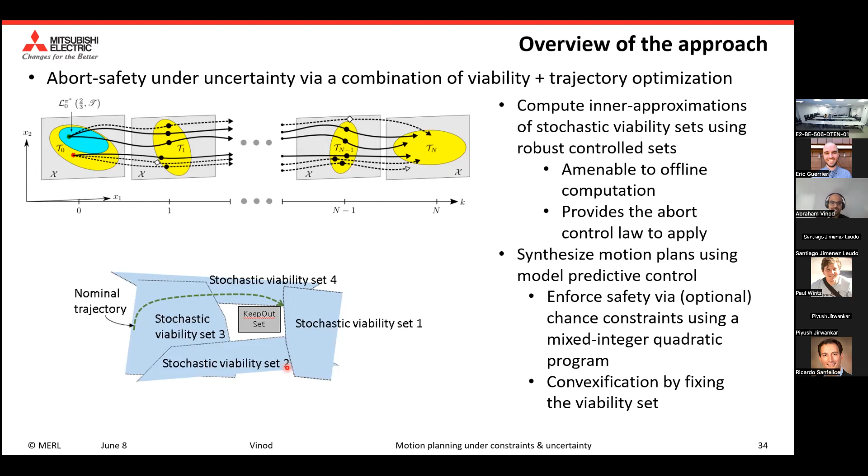You could, for example, convexify by considering only one of these viability sets and staying within that, in which case this problem simplifies into a convex quadratic program, which you can use.

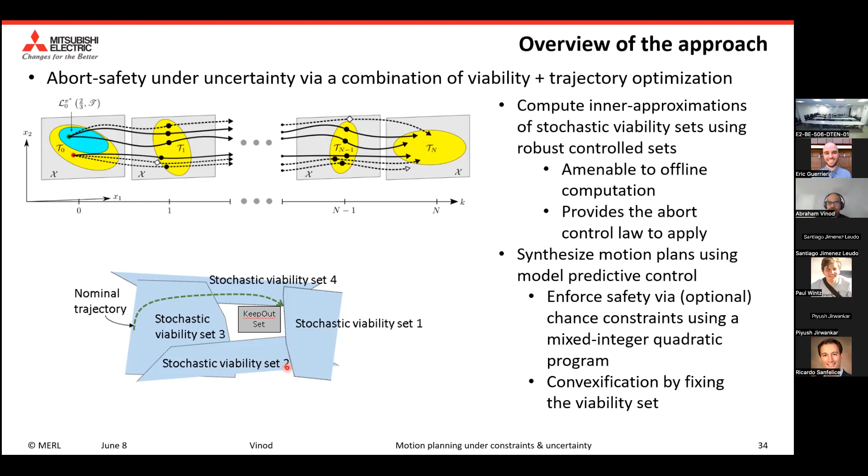However, the set computations do require use of MPT, the multi-parametric toolbox, which has some numerical issues that come about when you do the set computation in high dimension. So in future work, we are looking into improving that, and we're also considering time-varying dynamics that might arise.

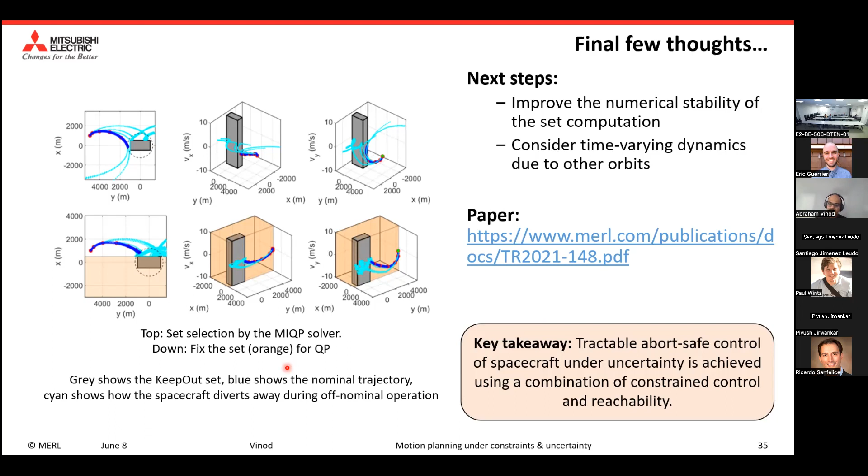In the example we consider here, it was a simple LTI system. It could be LTV systems in other orbits as well. And that pretty much concludes my talk.

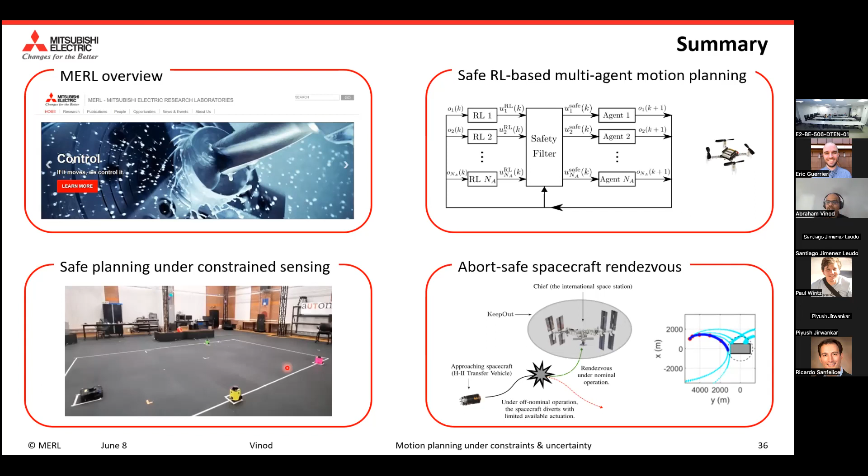So I've given you a brief overview of my work in safe RL-based motion planning, safe planning under constrained control sensing, and abort safe rendezvous. At this point, I'll stop here.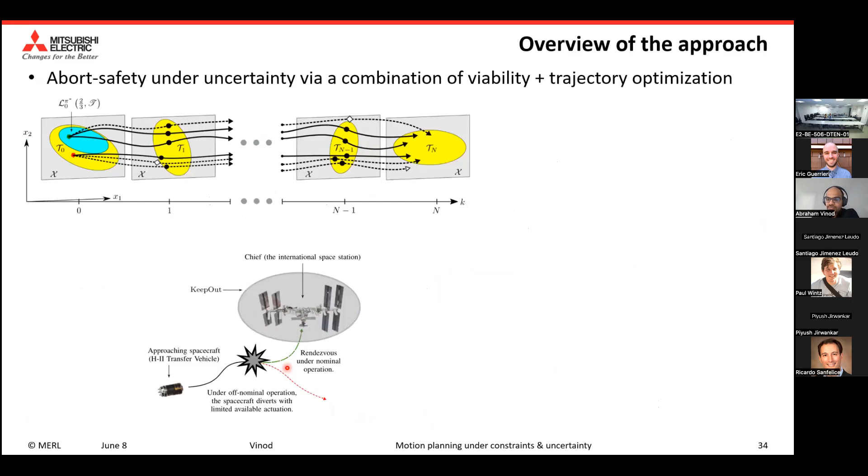I have a question about the reinforcement learning part, the first part of your talk. Since you said it's a motion planning method, do you have any theoretical guarantees?

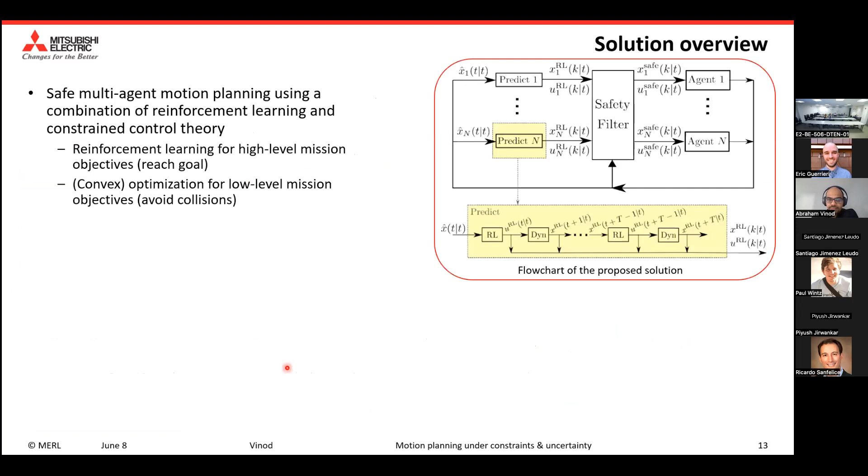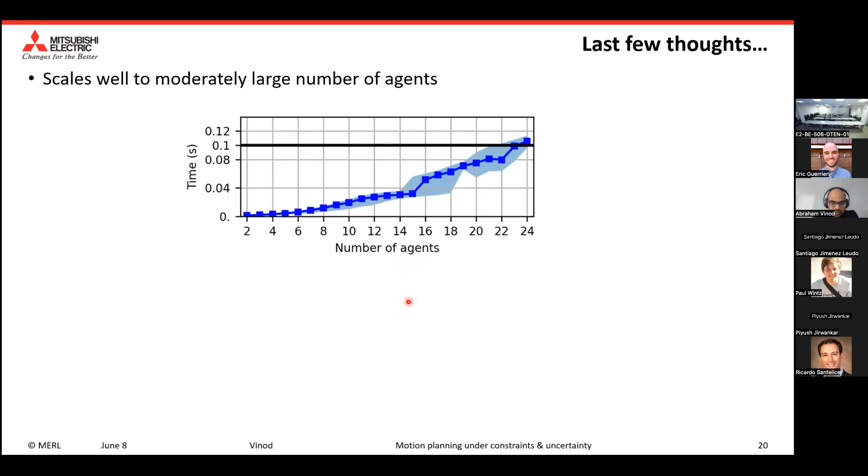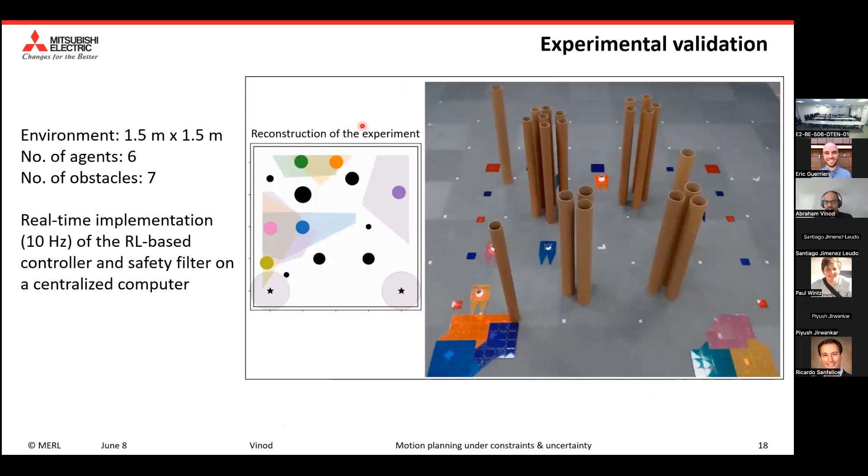So we have theoretical guarantees of the following flavor. The main theoretical guarantee that we have is the recursive feasibility on the safety filter side. What I mean is when we use the safety filter in conjunction with the reinforcement learning component, the overall system is guaranteed to keep our system safe. That's the one guarantee that we have.

Additionally, we have a secondary guarantee that whenever we start this problem from a feasible space, because of the way we construct our problem, that trajectory will be asymptotically stable, meaning our trajectory will be tracked well, and therefore the RL component is not going to introduce instability into our problem. This is piggybacking off the existing reference governor style formulation that we use.

Sorry, I didn't hear your first guarantee. The first guarantee was on the recursive feasibility on the safety filter side. That basically means that if we start from a feasible solution, a configuration where we are not immediately in collision, our safety filter will continue, because of the use of terminal constraints, to keep us safe.

Okay, so is there any case where your reinforcement learning failed to find the solution? The motion planning fails? What do you mean by fail, like it didn't get us a motion plan? So you mean the motion planning module just doesn't provide a motion plan at all? So that doesn't happen, because of the formulation of the RL block.

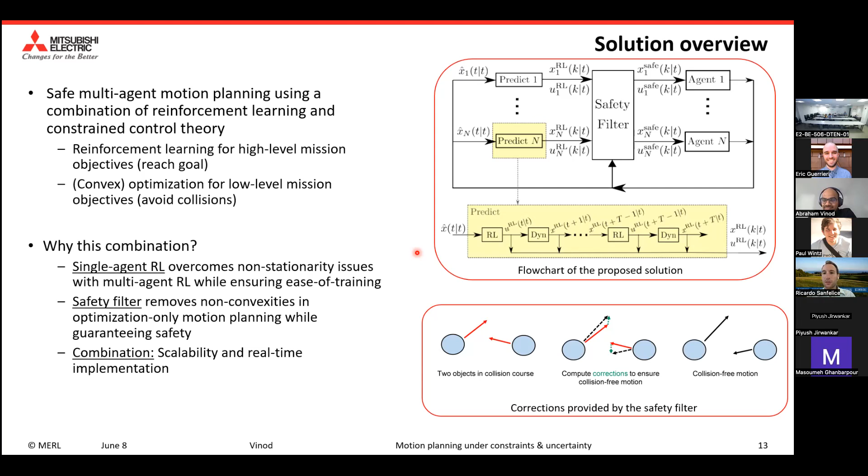Well, that's the interest, is to have an exchange and learn how things are being done on your end. Very, very interesting. Okay, with that being said, unless there is any other question, we will wrap it up.